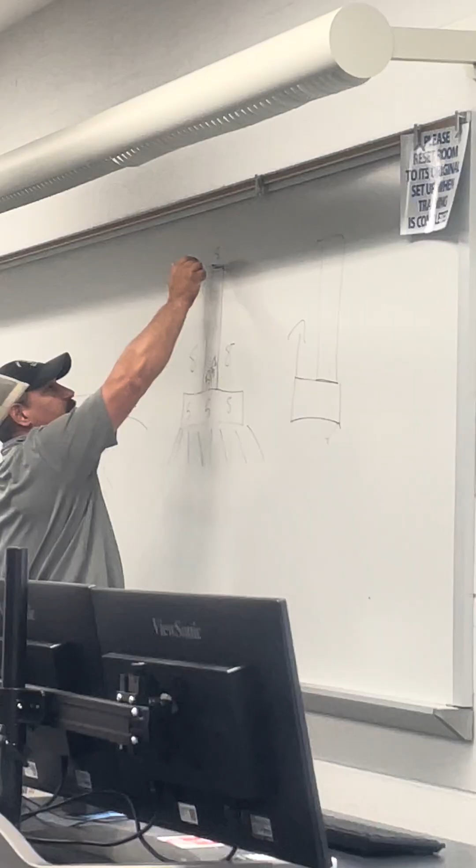Protected, or we could do a spread footing with a wall with a slab that sits on top of that, and then it's all gravel on there. So, it all depends on where you're at, what you're doing, okay?

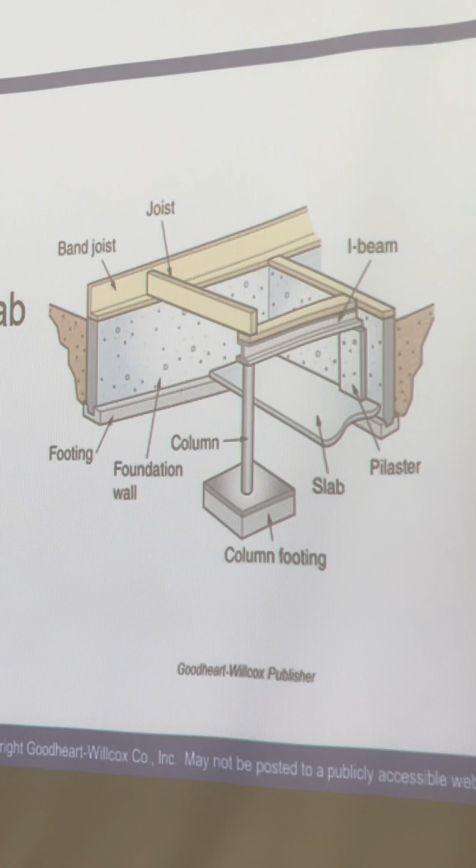Then you have piling and girders. So piling and girders are where we have bad soil, so we end up putting in what they call a grade beam. This grade beam might be, you know, 18 inches by 24 inches tall, 18 inches wide, 24 inches tall. And we've got these really strong grade beams that we ran rebar in.

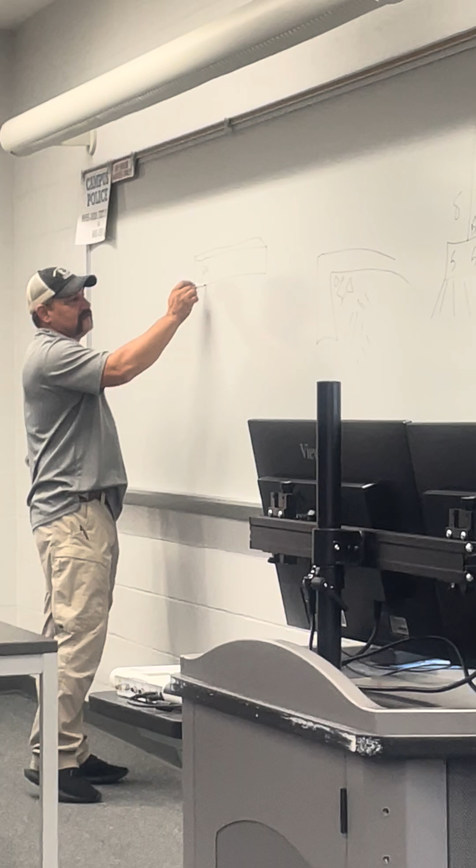And then underneath that, they can either drive in piling. Piling is steel. You drive it in the ground with a big hammer, a hydraulic hammer on a piece of equipment. You can run it down pretty far, 25, 30 feet. You know what I mean? Or they can come in and drill holes, and then pour those full of concrete.

But the point of this is we're building a bridge to hold the weight, and we're putting legs down to good soil. Okay, that's really what we're doing. We're putting the leg down and through the bad soil.

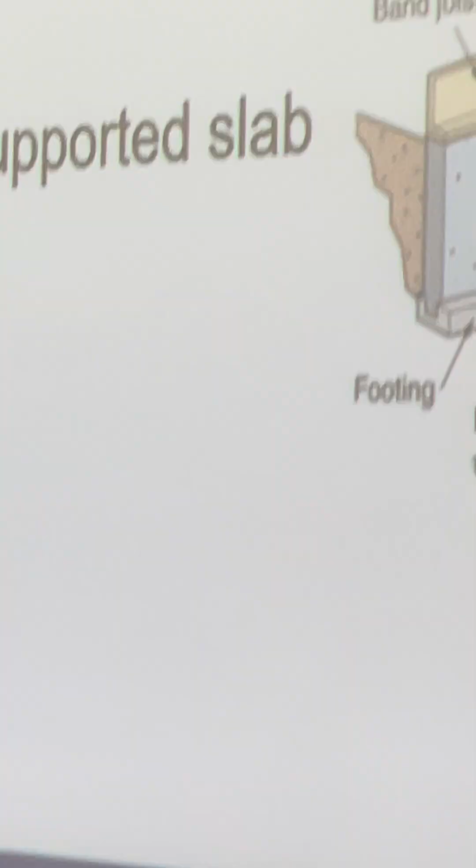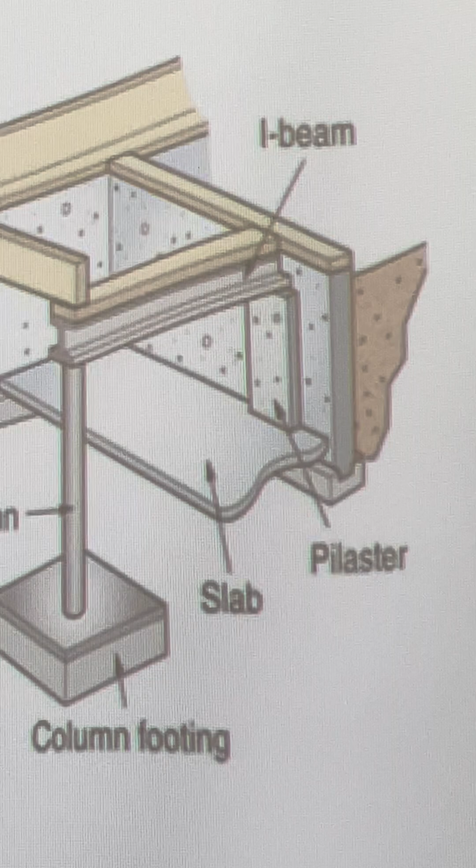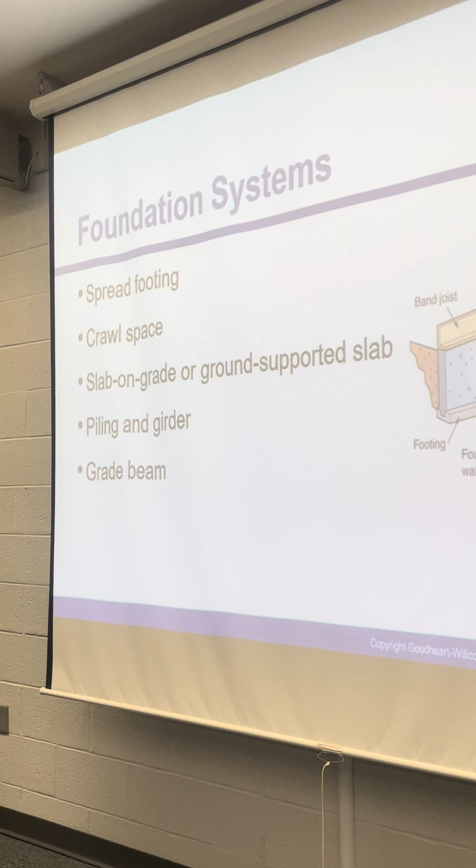Anyway, so we've gone through, let's say this is bad soil. So we're bridging the bad soil with this grade beam, and we're taking the piling or the pier. This could be a pier if we're digging and pouring full concrete, and we're running down maybe 6 feet, maybe 10 feet, maybe 35 feet until we get to good dirt or bedrock. Okay, it's just another way of doing it.

There are different types of pilings. There are pilings that you drive down until you hit bedrock. And then there's also what they call friction pilings. So you drive down until you hit a certain poundage. So, you guys ever use fence posts? Yep. So, if you drive a fence post in the ground with a driver, sometimes it drives real easy and you pound it all the way down 1, 2, or 3 times. Or sometimes you just drive, and it doesn't go in the ground, right?

Okay. So frost protected shallow footings. So this is one way that you stop the ground... hey guys, what's the frost depth here? Frost who? Yeah, how deep is the frost here? 36 inches. Oh, 16, 18 inches is as deep as it's gonna freeze here ever.

I don't know that I've ever seen it 16 inches here. I've seen it 12, but I've never seen it 16 that I can remember. I've dug a lot of frozen soil, but, you know, it's been 0 for 3 or 4 or 5 days in a row, and I've dug into the ground and only got about 12 to 13 inches of soil that was frozen. So, what we tend to do, this is one way, what happens to water when it freezes?

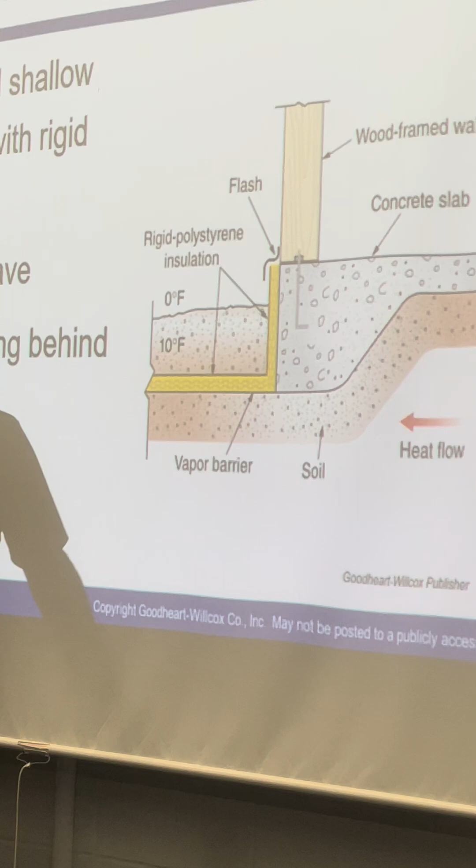9%, 9%, that's important. 9%. The reason why it's important is if it expanded 1%, it wouldn't really be that big a deal. But when something expands almost 10%, if you get water under the edge of your foundation and it freezes, your whole building picks up, your floor cracks, you have major failures.

Okay? So, in order to combat that, if we have a shallow footing, we put insulation on the outside and then we put insulation out away from the building. That way this freezes. This insulation stops it from freezing down deeper because the ground is naturally 50 degrees. That's the reason why we don't freeze deeper than 16 inches here, because we don't get cold enough. The ground has its own heat.

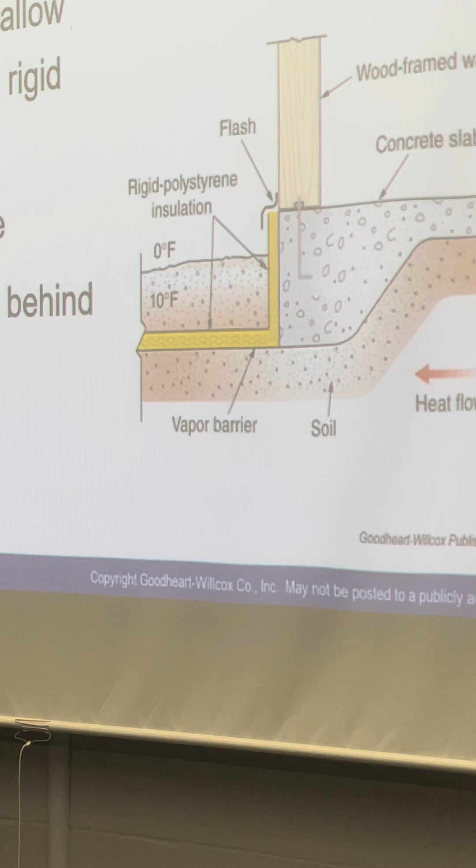So, we put that insulation in there and that keeps the ground temperature below this from working underneath that and freezing underneath the footing. Have I ever actually seen anybody do this? Why? Because we're only 16 inches. Wouldn't it be a little bit cheaper to just dig a little bit deeper and pour a little bit more concrete, digging out a bunch of dirt outside of it, and just getting down below frost level? Yes, it is. But we're talking locally.

In Chicago, frost depth is probably 36 inches. Now, we have to dig a lot deeper, and put a lot more concrete in it. Now this is probably cheap. You get into Wisconsin, you might be 60 inches. Northern Wisconsin, the frost depth might be 60 inches. Alaska, the way we build changes for where we're at. And that also goes for these types of foundations.

We want to pick our foundation based off of our site and our frost depth and all that kind of stuff. So does it make sense to do a crawl space in Wisconsin? If I have to go 60 inches deep, I'm pouring, and I'm gonna stick out of the ground 12 to 15 inches because I want to keep the dirt away from the wood. I'm basically pouring a basement anyway. So why not use that as a basement?

Will it work as a crawl space? Yeah, but if I gotta dig 60 inches deep, I might as well put a basement. There's very little cost there, let's put it that way. Very little cost. Get some extra square footage is what you're saying, so the value goes up. Well, property value goes up. There's no reason not to. It's the same cost, it's cheap.

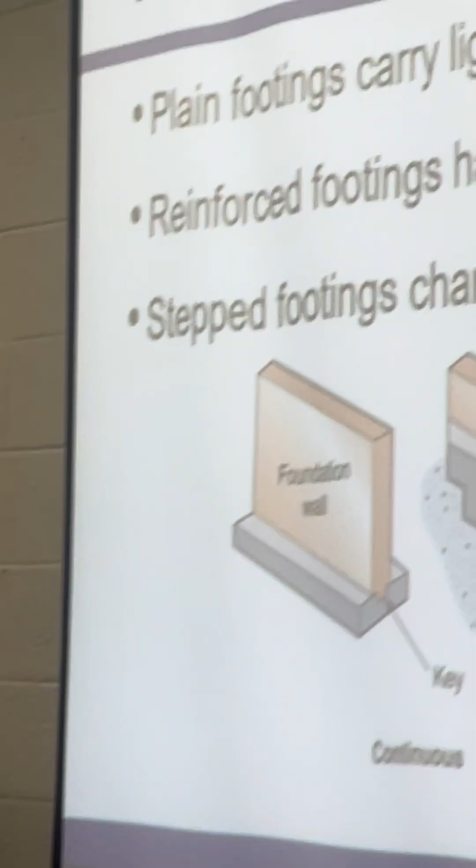Here's some footings. Here's a foundation wall sitting on the footing. If you look here, there's a keyway. A keyway is a mechanical lock to keep the wall from sliding back and forth.

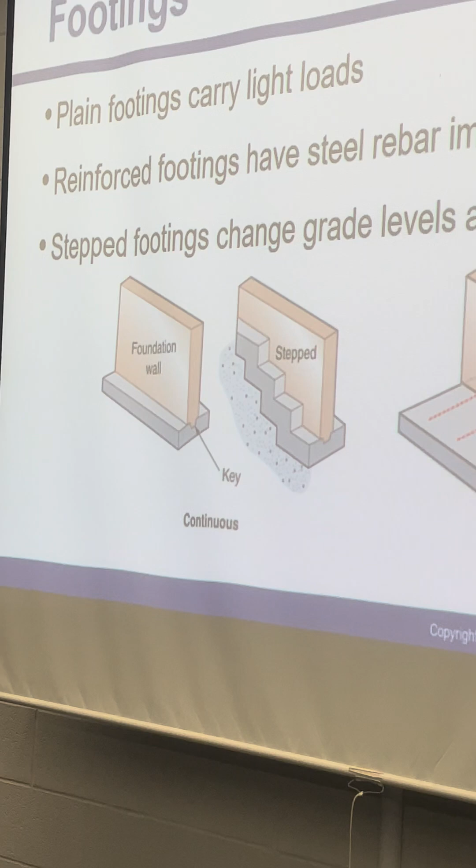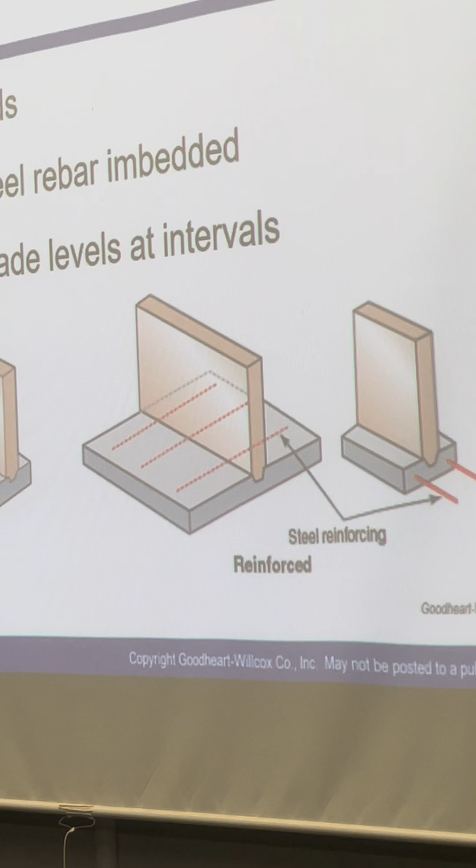We don't really use them as much in Southern Illinois as they do in other places, but we can also use other mechanical locks like rebar out of the footing to go up. But this also helps stop water from going through because there's a low spot in it.

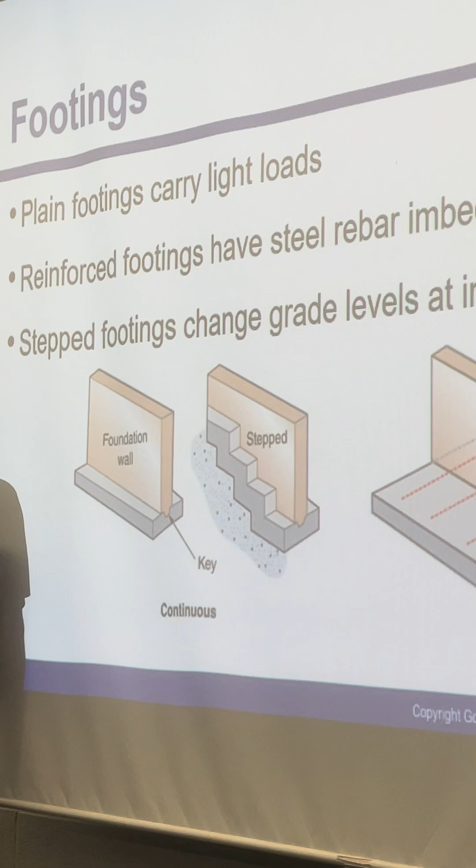But hydraulic pressure will always push through unless you have some type of water stop. Actually, there's a rubber water stop where it goes 3 inches down into the footing. It goes 3 inches up into the wall, and some concrete goes all around it, and then it's actually got a rubber seal in between it. A lot of times we'll do that vertically in a wall when we have to stop or two walls together, put that water stop in it. But there's a keyway, that's for the mechanical.

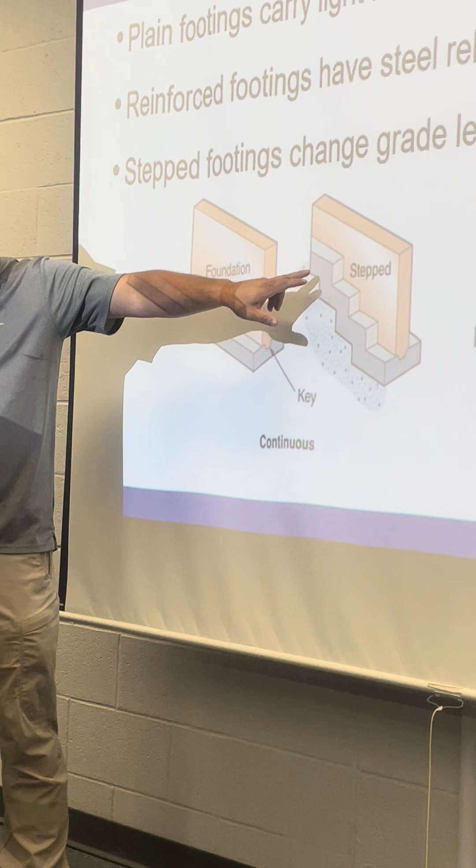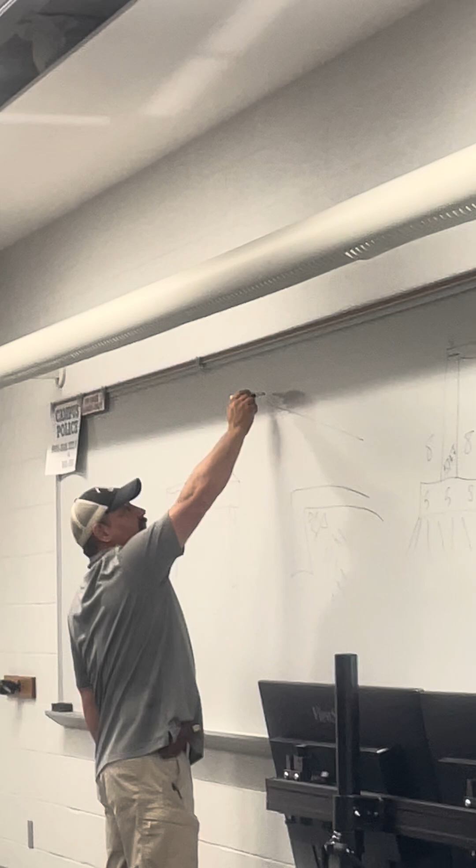Here's a step footing. So if we're on a slope block and we're putting in the crawl space, there's no reason to have a... I only want to be 9 inches out of the ground up here, okay? For my floor. But maybe it's 4 feet back here. So there's no reason for me to go and dig out all of this dirt. So we'll just come out here and do a step footing.

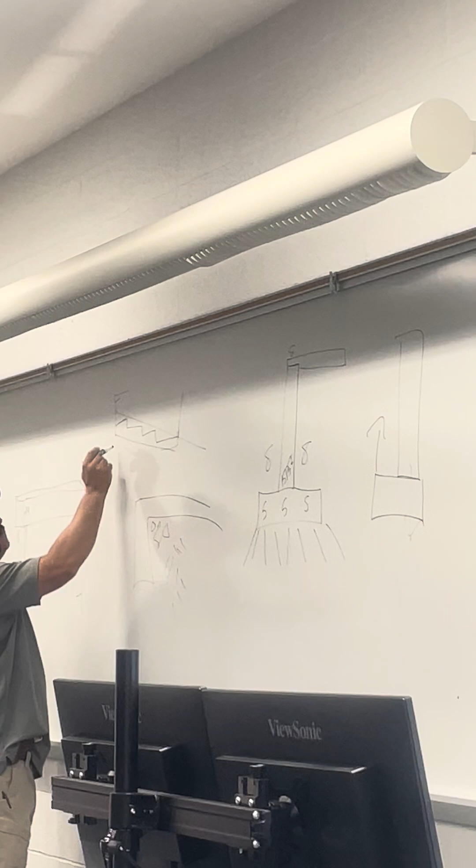So we're not digging all the way down this bottom footing like that. So we're not digging all of this dirt out that we don't need to dig out. We only need to be below the frost level. So we just dig a step footing. Typically, steps are done in 8-inch increments. Anybody know why? 8, 16, 24 increments. Because that's what blocks are, 8 inches.

Typically, you do step footings with blocks. CMUs? Yep. By the way, she had estimating class last semester, she got us in. So a block is called a concrete masonry unit. A CMU.

So typically, we're gonna do that because concrete forms are in 2-foot increments. And also, it's a little bit harder to pour a concrete wall with an out-of-level foundation. You end up using plywood or something like that, which is expensive, time-consuming. So if we're pouring a wall, typically, we'll try to get our footing flat.

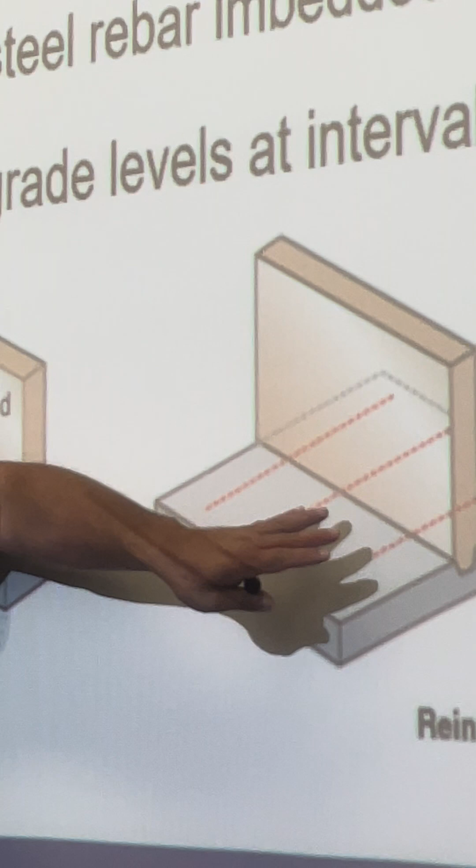Reinforcing, normally we'll run 1 to 3 bars in a footing, lengthways, and then sometimes if you have a thickened footing that's wider, maybe you got something like in this case here, maybe we've got a fireplace that's gonna sit on the inside, so we need a wider footing, we'll run crossways.

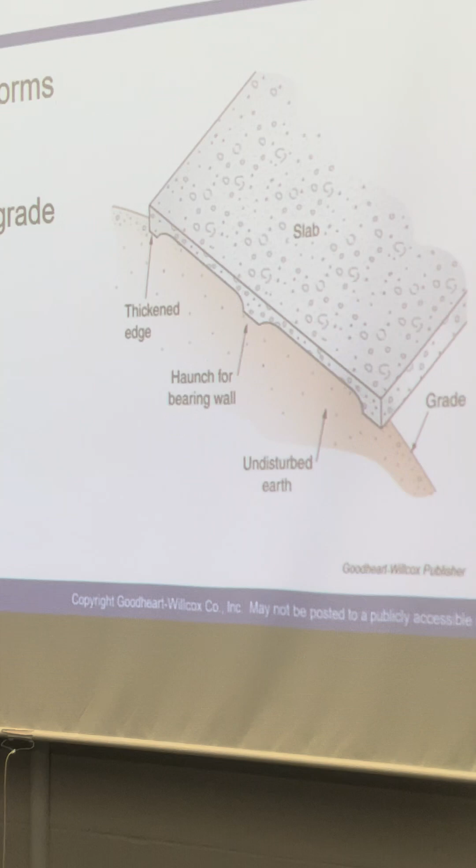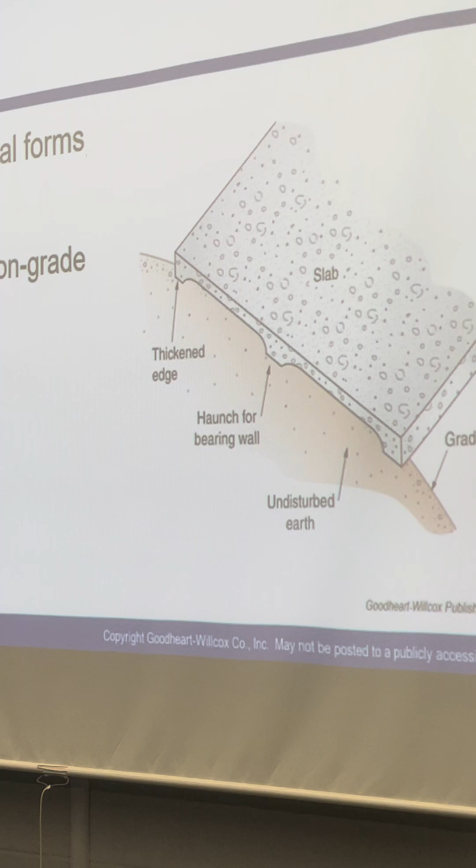So this is slab on grade. We actually pour the footing and the floor together. Monolithic is the word, mono meaning one, so monolithic slab. Meaning flat, like no elevations in the slab? No, mono meaning one pour. So we pour the footings and the floor at the same time.

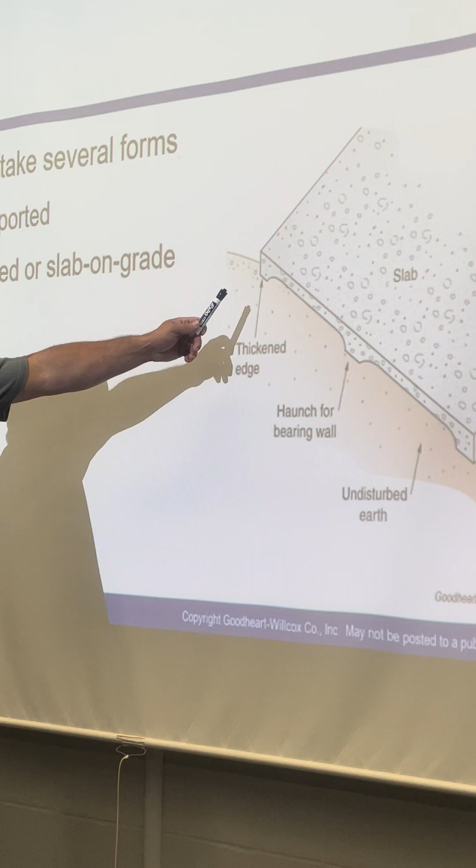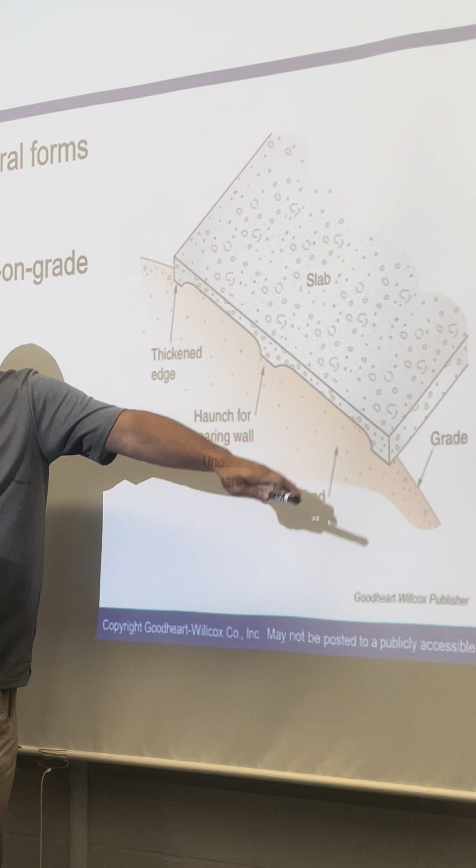Okay. So if you look here, this is not a very good picture, but here's the footing and the stem wall, and there's a thickened spot, and there's a footing and a stem wall that's going down. This is the top of the flat slab. We pour it all together.

Where do we do this at? South. Well, yeah, but we wanna do this in warmer climates, not really cold, because it gets expensive. It can be done anywhere. We can do this in Alaska. But it gets more expensive because we gotta get below the frost line, or we gotta do that insulation where we're insulating the ground.

But we also do this where we have decent soil. Where we have consistent soil, like in Florida, I wouldn't call that decent soil, but it's all the same. So it doesn't really matter where we're at, when we pour it, it all flows together. The monolithic slabs are very good for earthquakes and bad soils.

Because in an earthquake, what happens? Anybody know? They crack? Yeah. The ground moves. The ground becomes liquefied. Okay? It bounces? Basically, yeah. And a monolithic slab becomes a raft. It just kind of floats with it. It's all together.

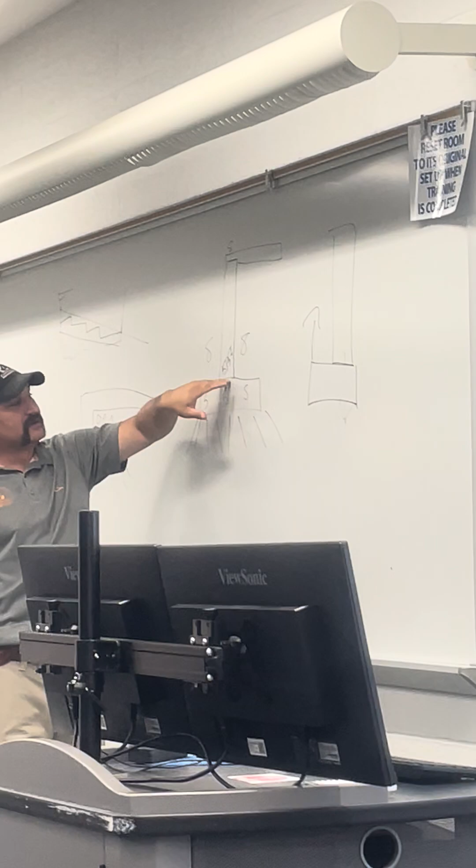Unlike spread foundations, spread footings and walls, these aren't poured together, so there's a weak spot right here, there's a weak spot right here. In this case, when all of this goes, it can all move separately and come apart. Whereas a monolithic slab, poured with rebar, matting and everything else, just kind of floats like a boat. So it's very good for bad soils. As long as you don't need to go deep, okay? When you start getting deep, it becomes more expensive.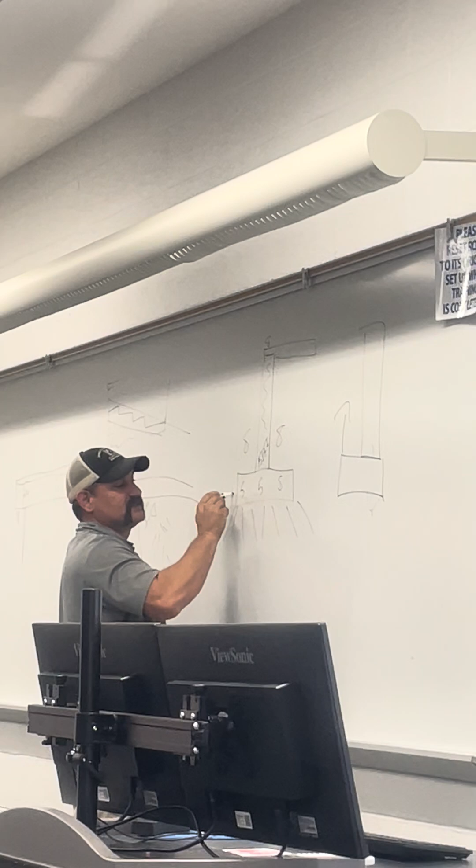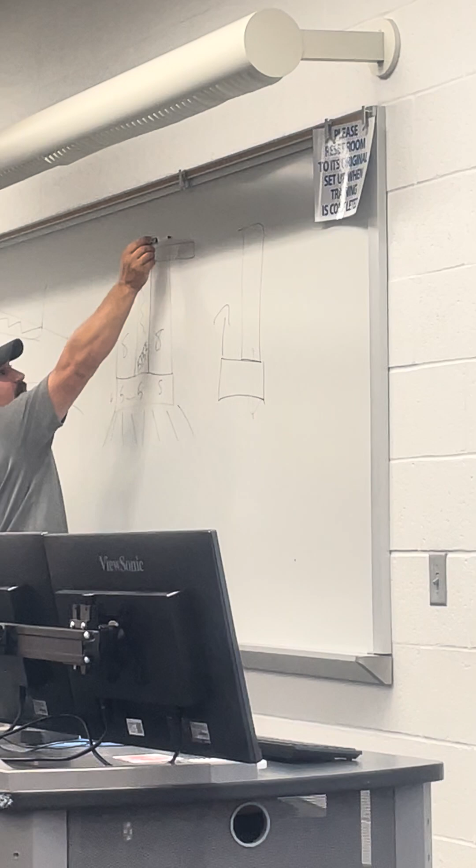Because, well, think about it. If I need a 2-foot wide footing, in this case I've got 8 inches of concrete with a 6-inch slab underneath. If I had to have this type of weight distribution and I was doing a monolithic slab, I would have to have 2 foot of concrete all the way down. Does that make sense? Because I'm not forming up a wall. If I'm pouring monolithic, the whole trench would have to be full of concrete. So I'm tripling the amount of concrete that I use in a monolithic slab for my wall.

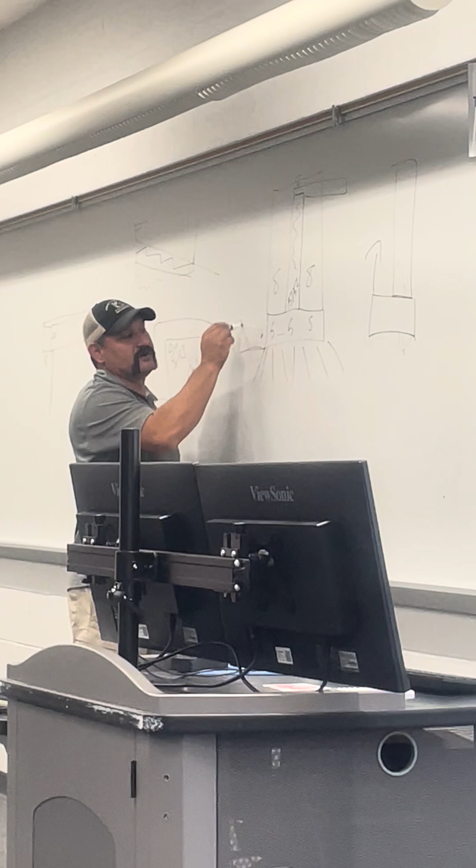So once this gets, in my opinion, deeper than 24 inches, it starts to become not cost effective. And the 24-inch line is, basically, once you get to Effingham, we start looking at this like this isn't really cost effective. Because Effingham has about a 24-inch frost depth. But anywhere south of Effingham, this can be efficient if it works for what you're doing.

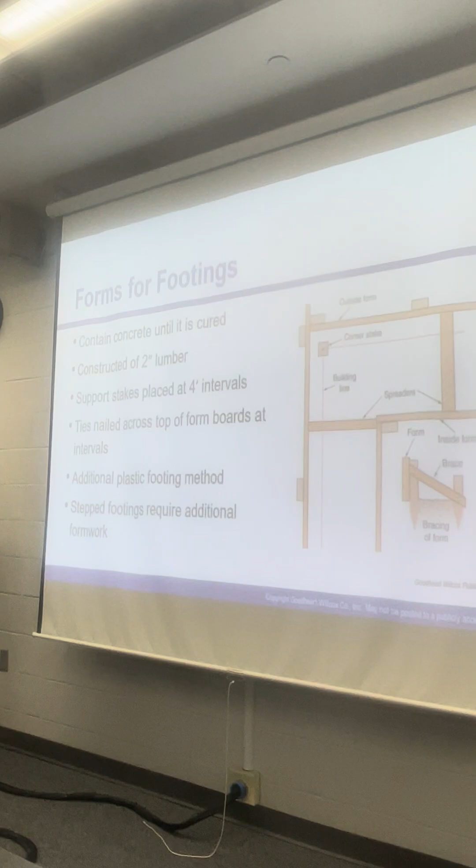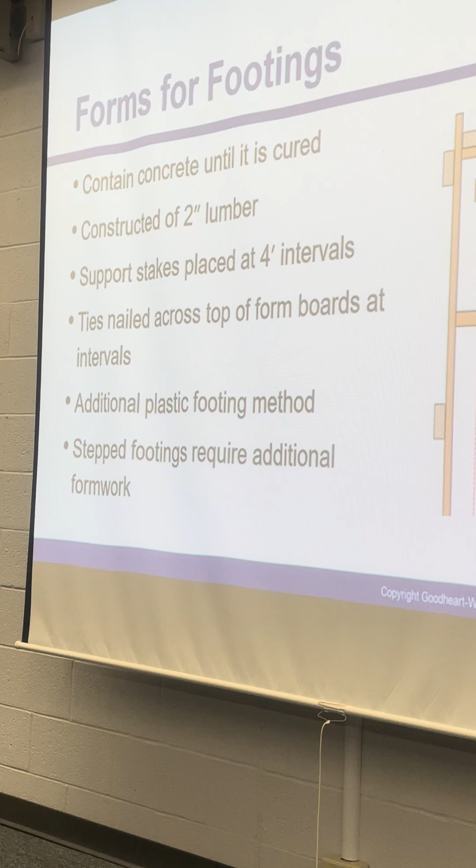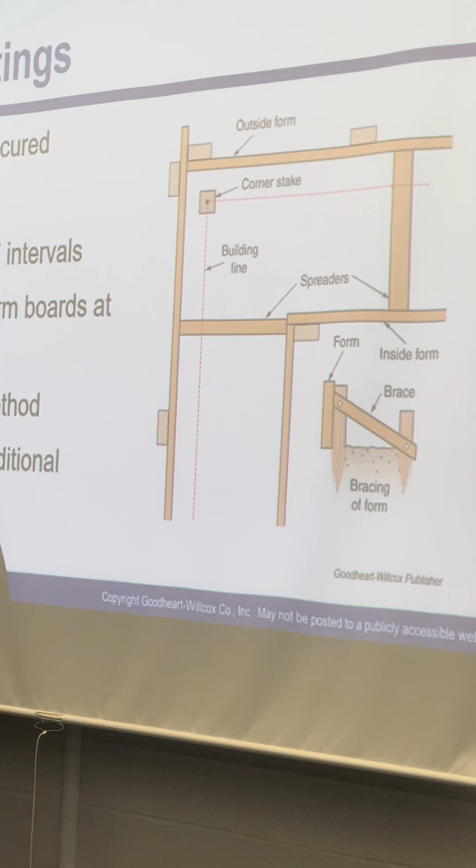We can put wire mesh, rebar in the concrete. Here's some footing forms, and we're gonna do some footing forms in lab here, probably starting next week. So you come in and we're gonna set an outside form, then put a spreader and set an inside form, and probably pour concrete. I'll show you how to do it. Basically setting concrete forms.

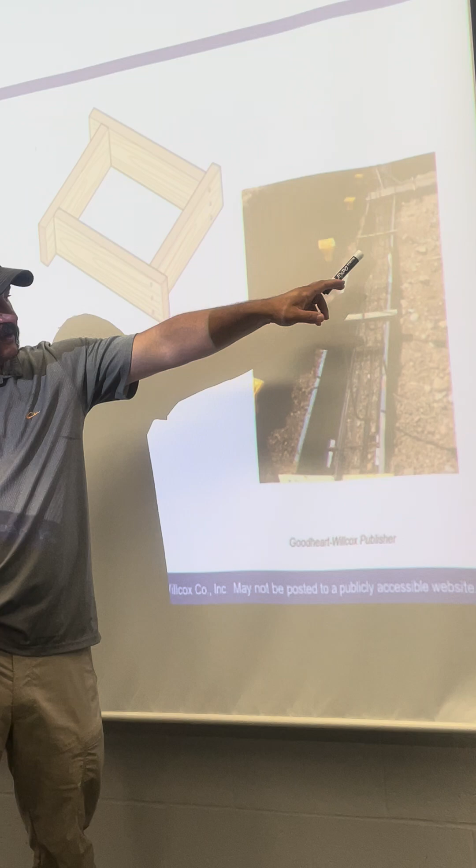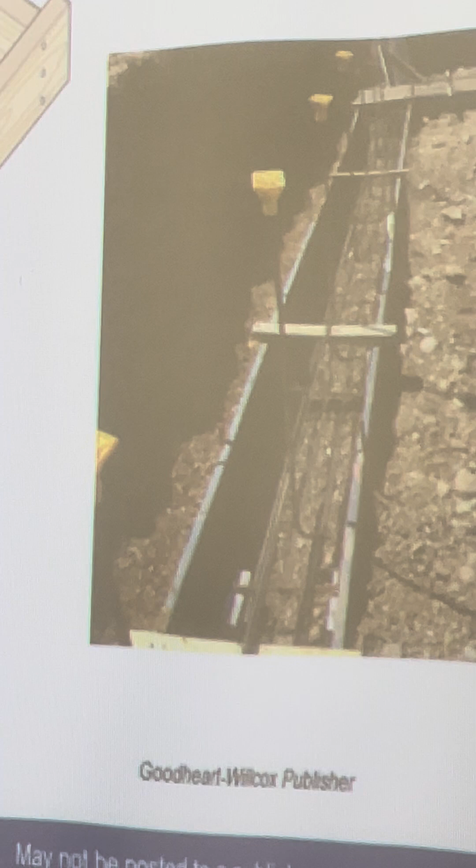Here's a column form. It's the same as digging a footing. Now here is a down view of this, and this is actually form-a-drain that's here, and it's not wood. You can't really see it on the screen very well, but form-a-drain is sized like a 2x6, except it is plastic and you don't remove it. It's got little slits in the outside of it, you put rock up against it, and the water goes into it like we were talking about with the drain tile. So if we put a drain tile down, we put rock all around it, the water runs through the rock and then goes to the drain tile and goes out.

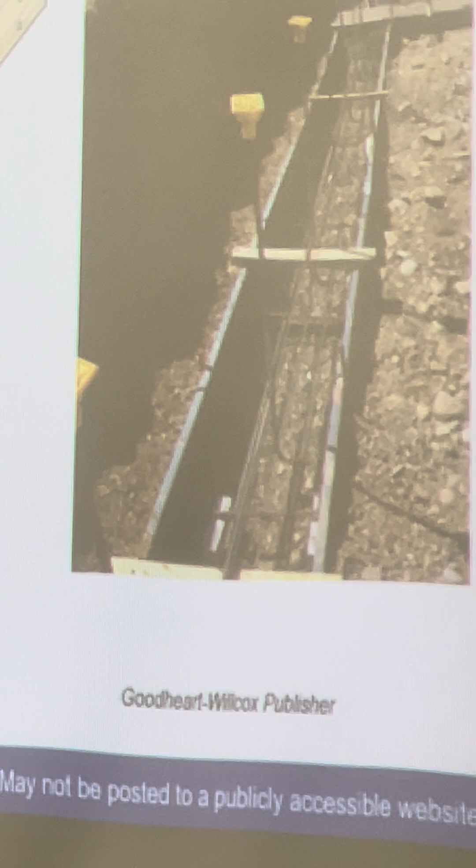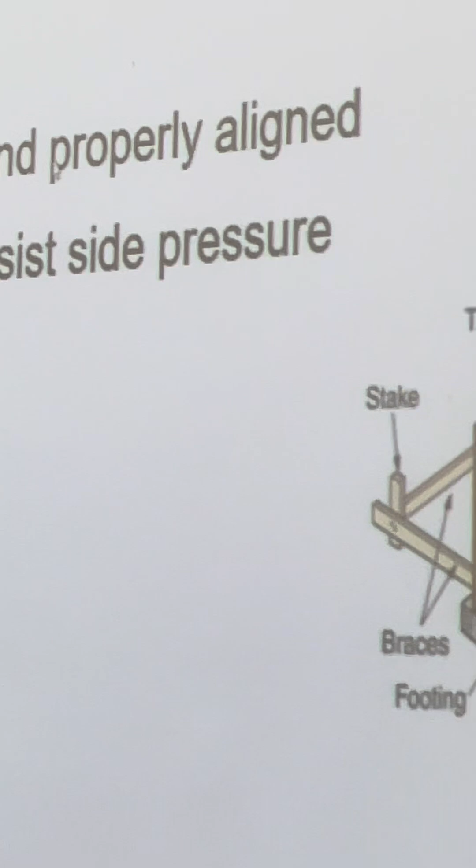Well, with form-a-drain, you don't need the drain tile. You buy the form-a-drain, it's plastic, it's got holes in it, it connects from the inside to the outside. You put rock all around it, the water goes into the rock, into the drain, and then it goes out through the form-a-drain. So you're kind of doing two things at once. It's a very good product. It can be a little bit more expensive, but what's really neat about it is you can put pipes from the inside to the outside. So now we can remove the exterior water. The interior drain is the exterior drain.

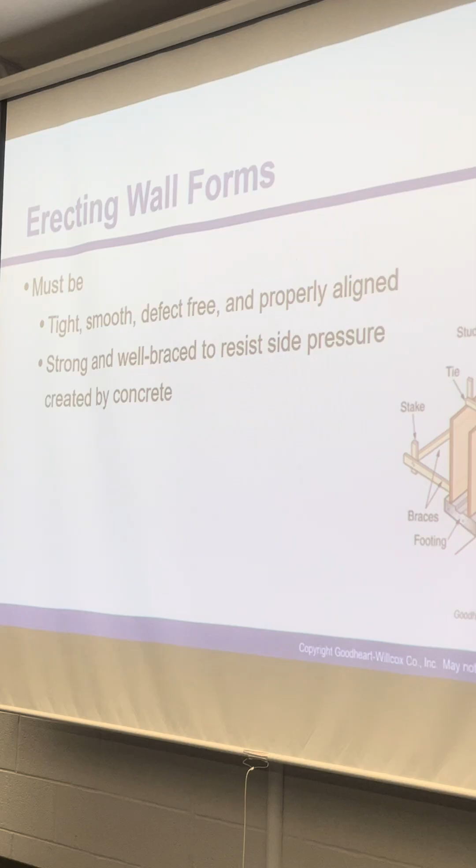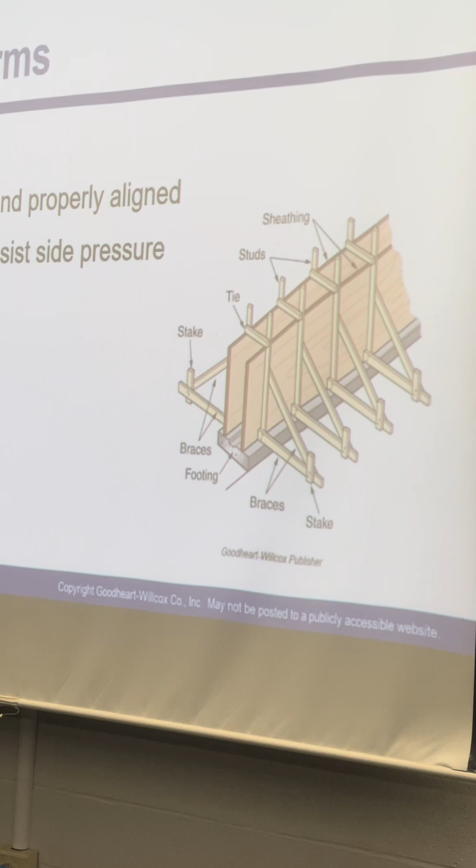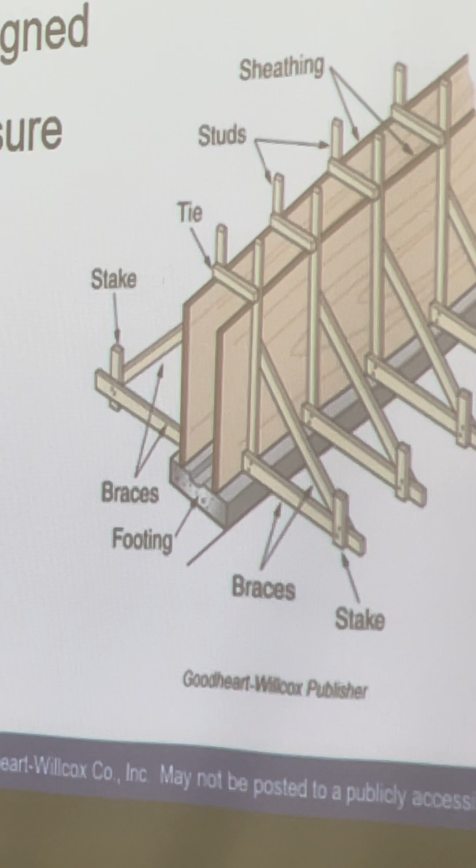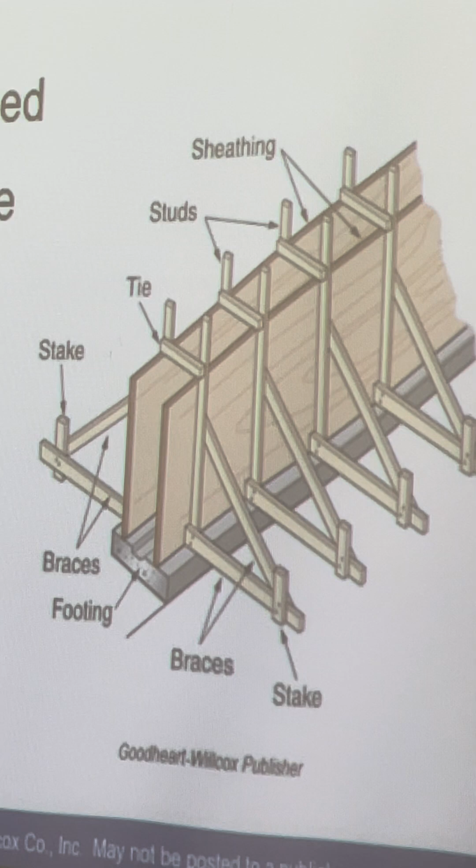And also, you don't have to remove it. So you can set it in there, you can backfill the rock, and then when you pour the concrete, you're done. So it saves a little bit of labor. It definitely saves labor when we're talking about coming back and having to put in the drain tile on the outside. But you gotta run the numbers on this stuff, on whether it's really cost effective. Sometimes the labor is cheap. People always think labor is super expensive, but some things only take minutes to do. You still put rock in, it only takes a couple minutes to lay the drain tile down. Now, sometimes depending on the basement, it might take a couple hours to remove forms.

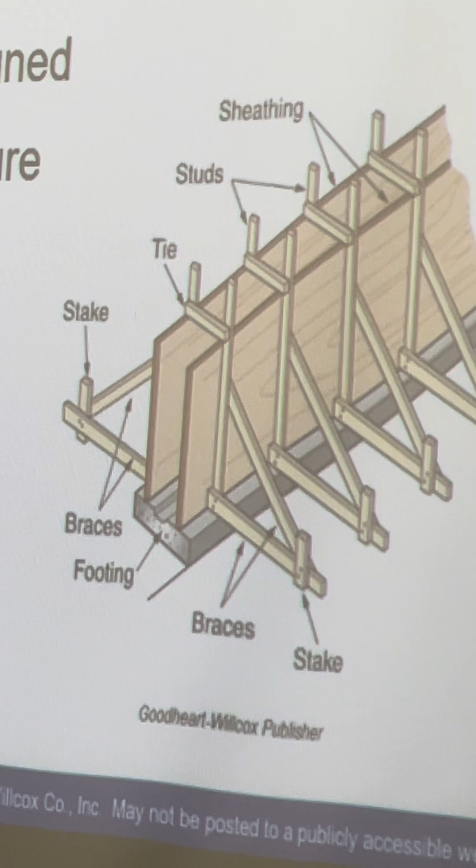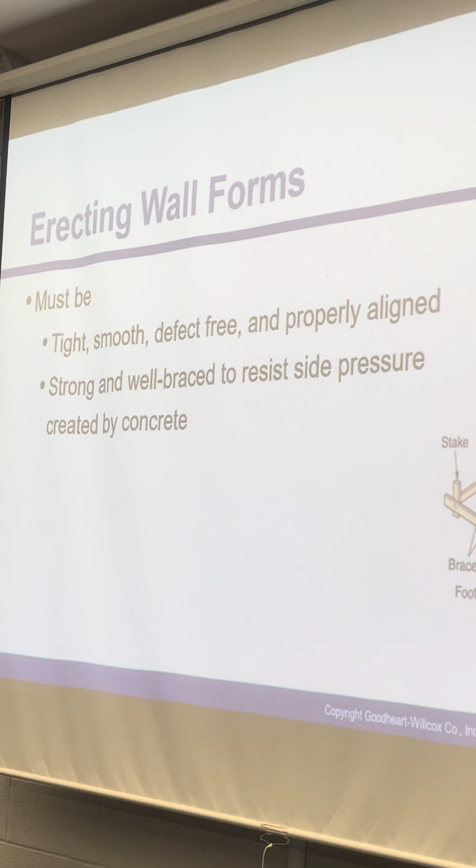So you might pick up $600 there, which might offset the cost of the form-a-drain. That's part of management, looking at all this stuff and trying to figure out the cheapest, most effective, because sometimes, if we're on a rush schedule, time is worth more than money. Sometimes if you're not on a rush schedule, it's just whichever one's cheapest.

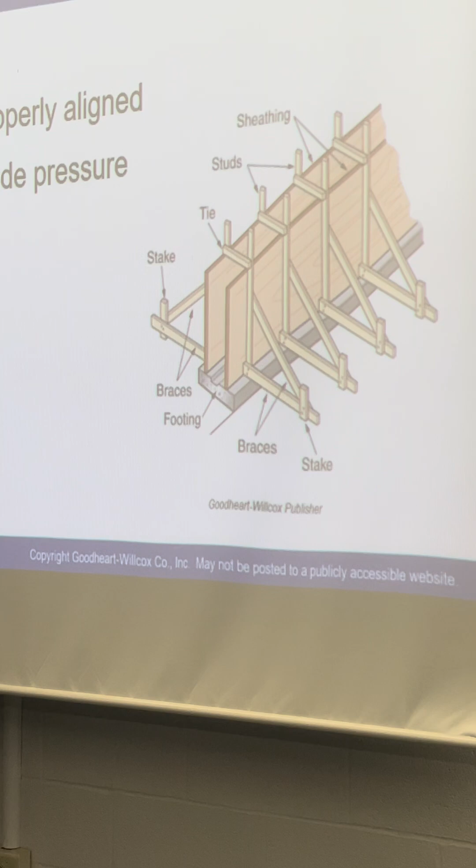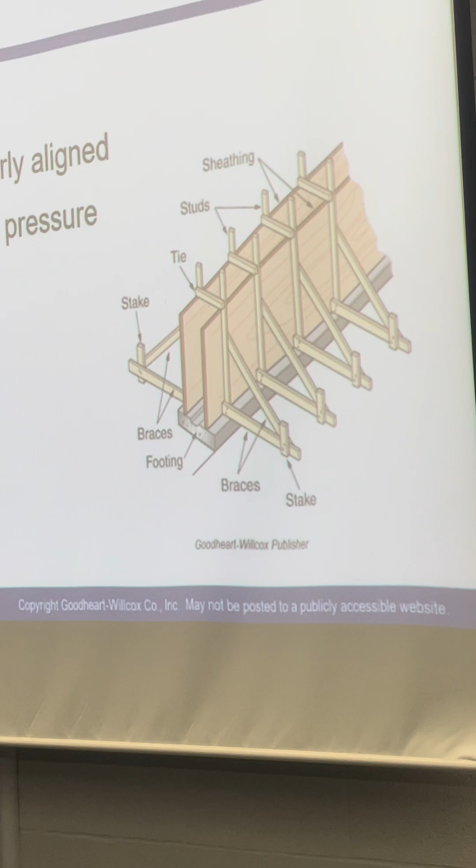So this is one way to build forms out of plywood. I've never done it like this. I don't like it. I would never do it. I don't recommend you doing it. But it will work. The reason why I say that is, first thing, I'm not a big fan of plywood forms at all. And there's a lot of cutting, there's a lot of wasted material here.

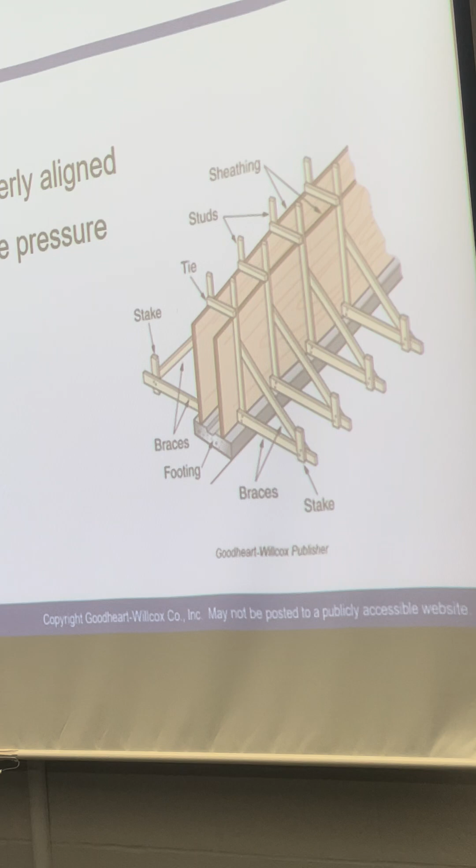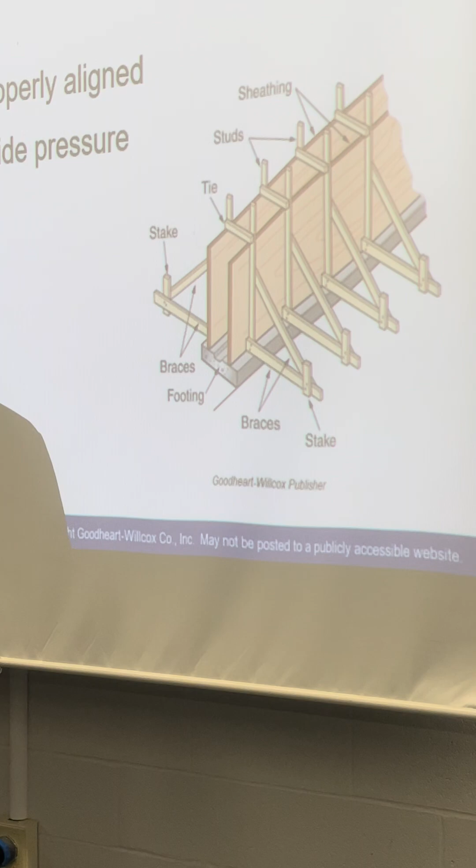In other words, I don't mean wasted. What I mean is non-reusable materials. Unless you're doing this for a living, more than likely this board is now scrapped, this board is scrapped, this board is scrapped, and possibly this vertical board is scrapped when you're done with the job. So you bought all this material, and you're throwing it in the trash. Now, there's better ways of doing it.

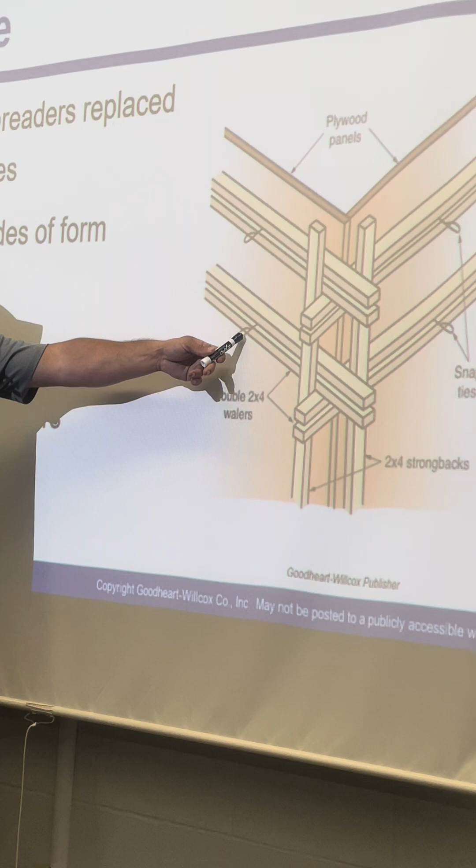Alright, so this is a different way of doing it, where we're using wall ties that go through the forms, and they have what they call a cat head that goes on top of that tie, and a pin. You put a cap over it, you drive it down tight, it's got a pin that goes through it. This is what you would consider to be an internally supported form. The other one that we just looked at was an externally supported form.

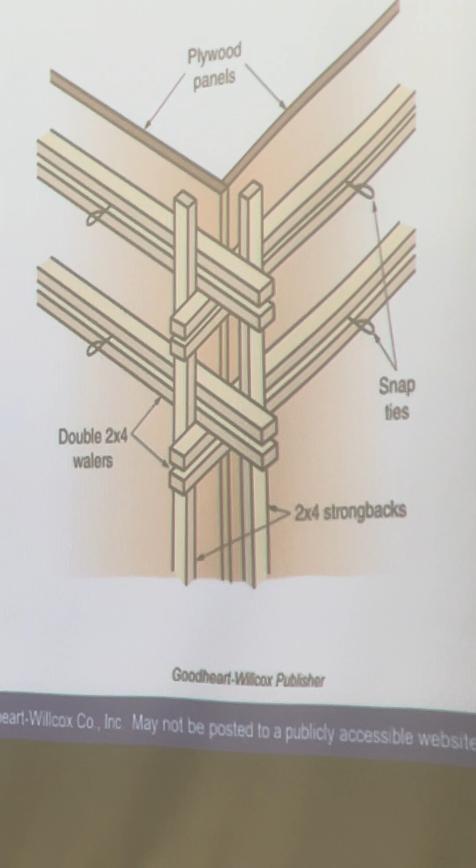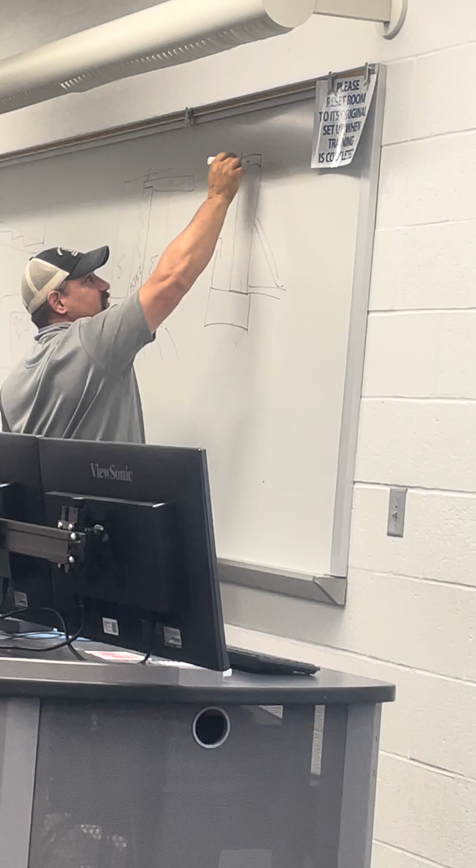So in other words, the first one we looked at, we were kicking braces on the outside, right? We had board here, we had board across the top, okay? So we're supporting everything from the outside. Well, the problem with that is the deeper this goes, the more hydrostatic pressure's on it. So even if it's an 8-inch wall, if it's 10 feet tall, there's a massive amount of external pressure going onto this thing. Massive amount.

Put it this way, I poured a 4-foot wall, and I put a bunch of bracing on it, did a bunch of stuff, and I parked a Bobcat up against it. To keep it from collapsing? Keep it from moving. And it moved the Bobcat, blew it all, and that was only 4 feet. It's probably one of the hardest things, in my opinion, to do, and I've poured a lot of concrete, guys, I've poured a lot of basements, a lot.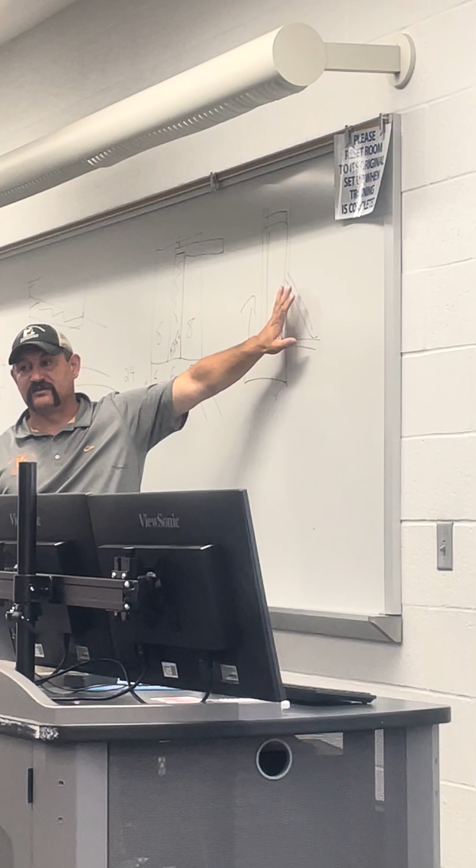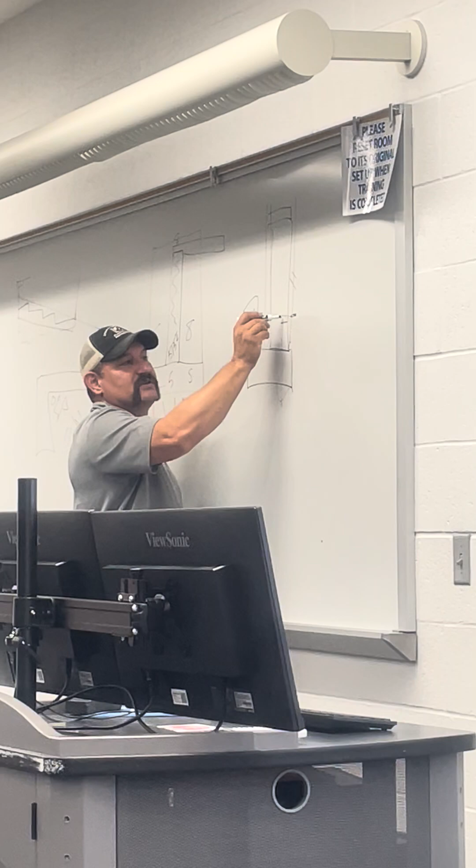This is very different. Retaining walls are all made like that though? How are retaining walls made? Like that with forms? This is one way. Okay. So this is externally supported. Now, internally supported is the best way. And the reason why is this style, where you have a tie that runs through the middle. Now, all of the pressure that's pushing this direction is equally pushing that direction.

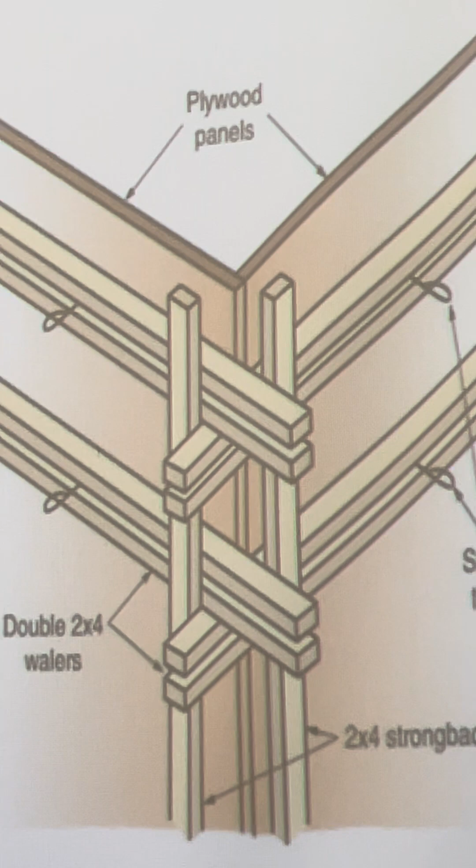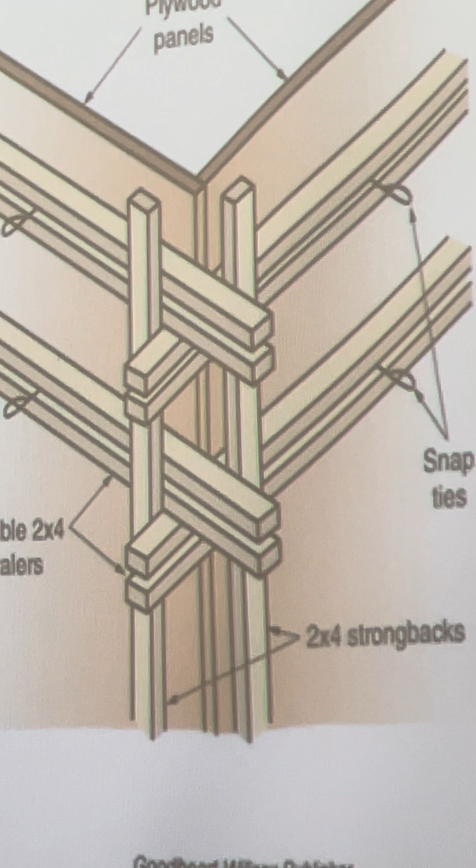With rebar tie? Those ties that go through? Wooden? No, it goes all the way through the thing, tied on both sides. So when you have a steel bar, which is a tie, that runs in here like this, and you cap it on both sides, it can't go anywhere. Now, the same amount of pressure is on both sides of the thing, so it's equally pushing out like this. So it's actually holding itself in place.

Internally supported is the way to go, because all of that hydraulic pressure equals itself out. That tie is going to stop it from coming apart. And the pressure pushing this direction is equal, so it stays in one spot and doesn't move, unless you vibrate it or do something.

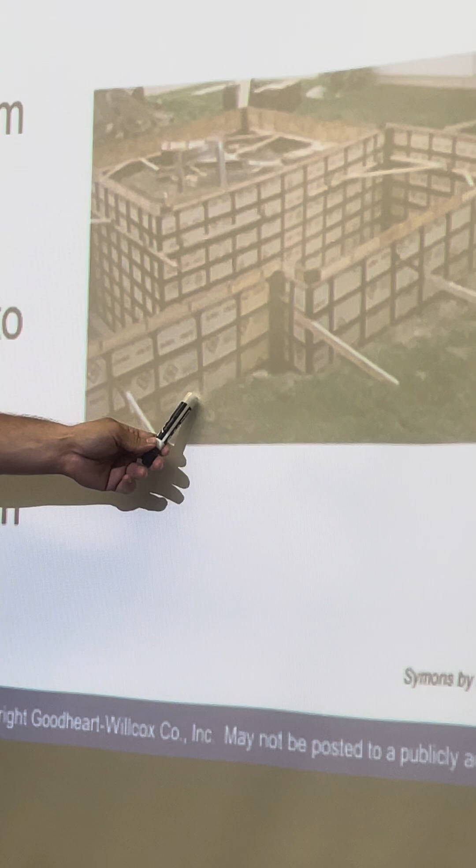So these are panel forms. We're going to set up a basement out in the shop. We've got some panel forms. Panel forms are an internally supported form, like what we just said. They come in all different widths. Typically a 2x8, 2 foot wide, 8 feet tall, is the most common for a basement. So this is a brace, this is the form. This area right here, 2 feet wide, is the form, this is another form. These are braces going down.

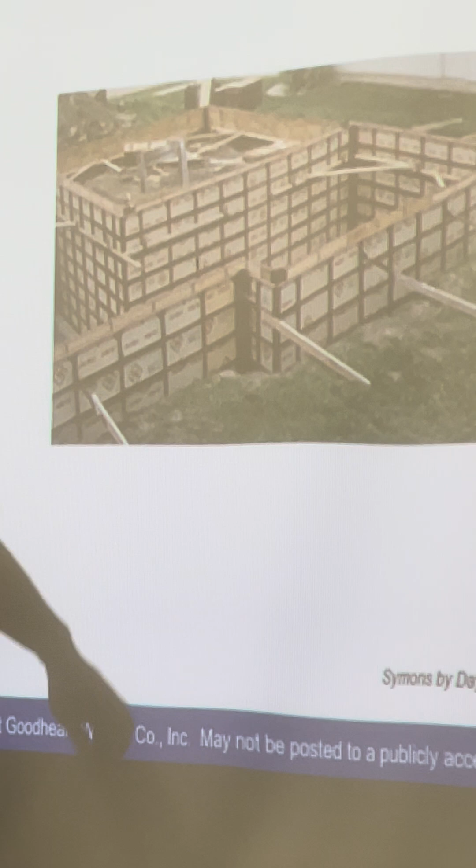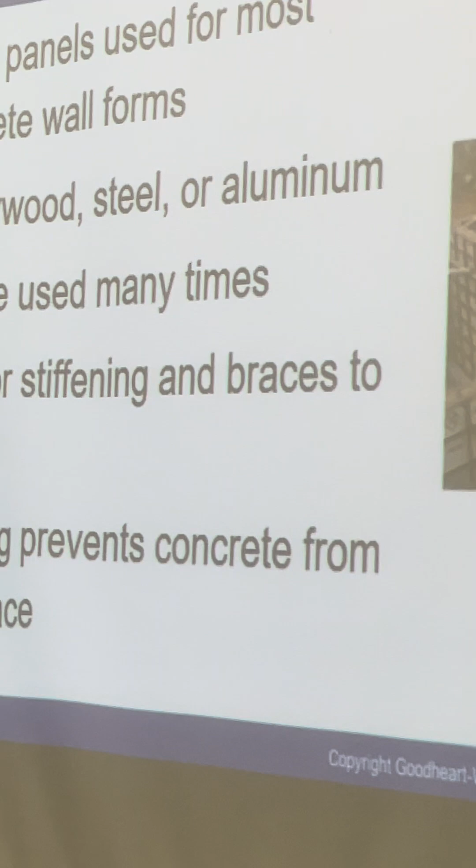So on every one of these vertical seams, about every 18 inches, you have a steel tie that ties the inside to the outside. And we'll go through all this and I'll show you all. It's prefabricated, it's very easy to install. I probably put in 200 basements with this form.

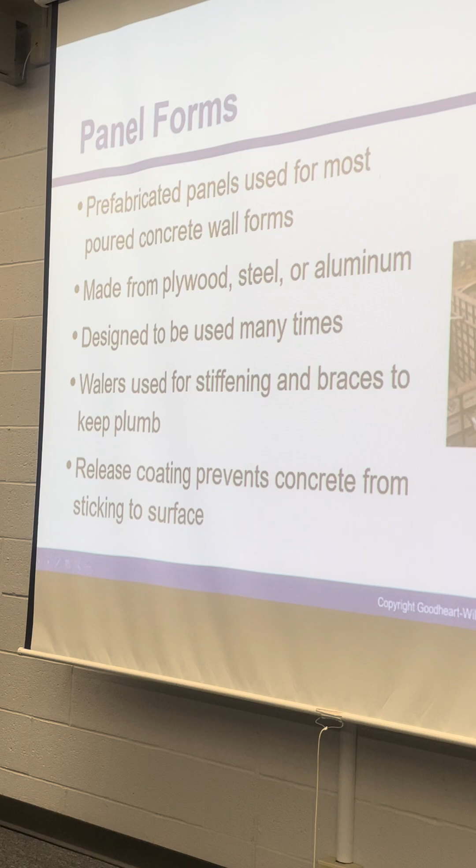At one time I had 3 semis with semi-trailers, and they were all full of these forms. We could do 4 to 6 basements, depending on the size of the basement. I think we could do 6 30 by 40s at one time on different spots. Really, really good stuff. Expensive. And we'll go over this out in the shop a little bit.

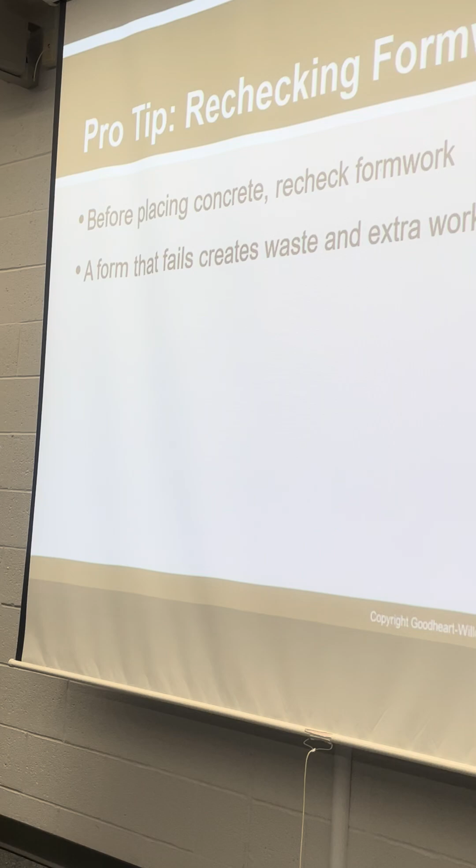This says recheck formwork. Before anything, when I was using those basement forms, the entire crew, didn't matter how big the crew was, if there were 10 people on the job, the entire crew checked every pin on the job. And I'll show you what pins look like. I got one. So they'll go into the